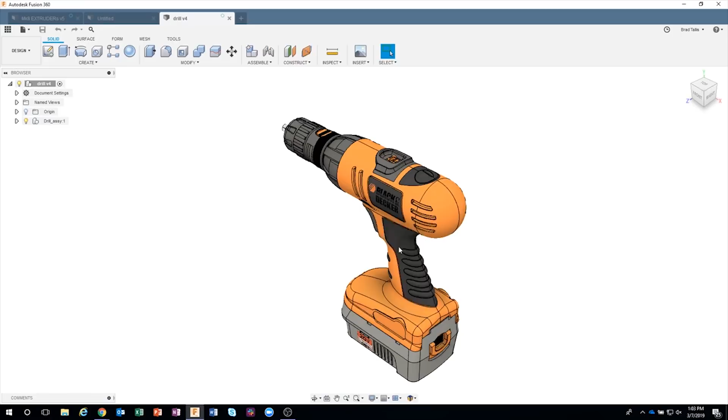wires in here? So if I open my browser here real quick, and my case, let me just turn this part off. You can see that I have a bunch of wires going from the switch to the motor and to the battery, etc. And people were asking, how do you create these? So I'm going to share these tips and tricks with you.

Okay, so I'm going to start out simple just to kind of show the methodology, and then what we're going to do is we're actually going to route some wires from this 3D printer hot end extruder. So I might want to run some wires from the hot end through this wire clip, and then I'm going to show how you could create, for example, a bunch of wires, and even how you could twist those wires together. So that's what I'll be showing today.

So the first thing we want to do is to create the path that our wire is going to route. And you want to stay as orthographic as possible. What do I mean by that? Well, I'm going to start by drawing a top view. So let's pretend I have a box in here. I'm trying to route the wires through this box. So this is looking top down. This is how I want my wires to go.

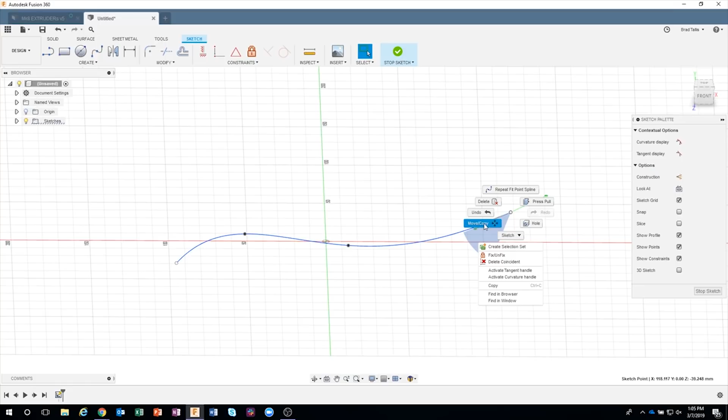Okay. Now, if we look at it from the side, these are all on the same plane. There's no height or anything like that. This is just a flat spline. But what's cool is you can actually come in, click on a point, and say move. So I right click on that point, and I'm going to say move. And this actually allows us to move it in 3D.

So you can kind of see as I'm looking from the top, kind of memorize what the spline looks like. You're going to notice that it's not going to change the look from the top, but now I'm going to look at it from the side. And again, I would recommend going as orthographic as possible. So now I'm looking at it from this front view, and I'm just going to drag that point up a certain distance. Okay, so it's no longer on a flat plane.

But if we look at it from the top, you'll notice that that didn't move at all. We didn't bring it down here or anything like that. We just told it to go straight up. Okay, so I could do that with other points. I could click on this point here, drag that point up, and now it still looks kind of like an S from the top, but then we've also given it a shape from the side.

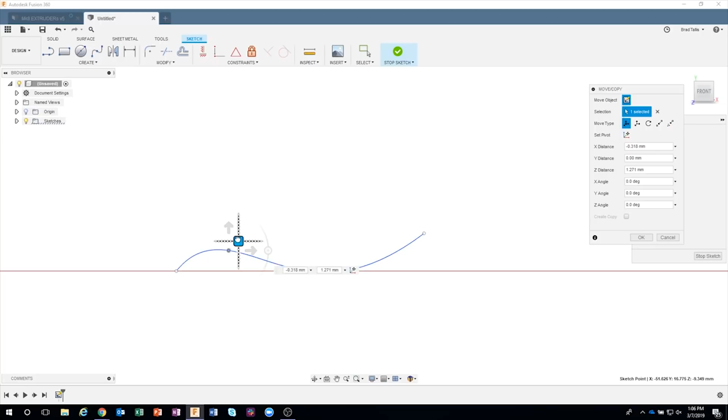Okay, I also recommend using just the arrows as much as possible. You can use these planes, but then you're moving it in two different directions. Instead of just straight up, you're also moving it to the right, okay? And that could change what your overall shape looks like. So once again, I recommend just doing one axis at a time, okay? So I'm going to back up here. I drew my top view.

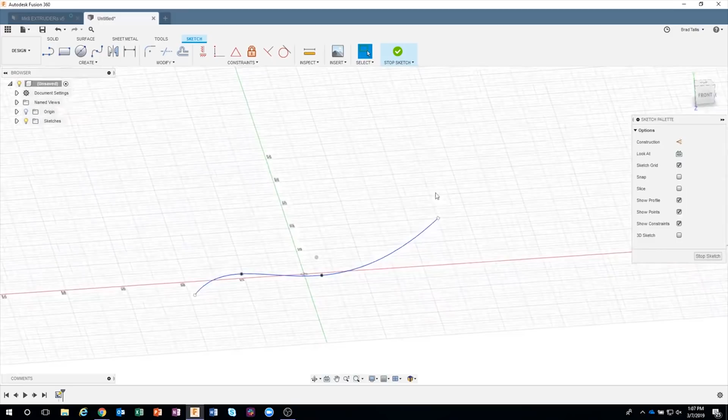Then I just click on a point, right mouse click, and say move. Then I'm going to rotate to a side view, or in this case the front, and just move that point. And I can be very specific. I could say 25 if I wanted to. And we're moving it just straight up. Okay? So that's the method for creating a spline that goes through space in all three directions, X, Y, and Z.

Now I want to sweep my wire or wires along that. And the second tip is I recommend creating a sketch plane on a path. Okay, and the reason for this, I'll show you. I'll go ahead and just click on this path. You can see that it's going to create a plane that's tangential to that path.

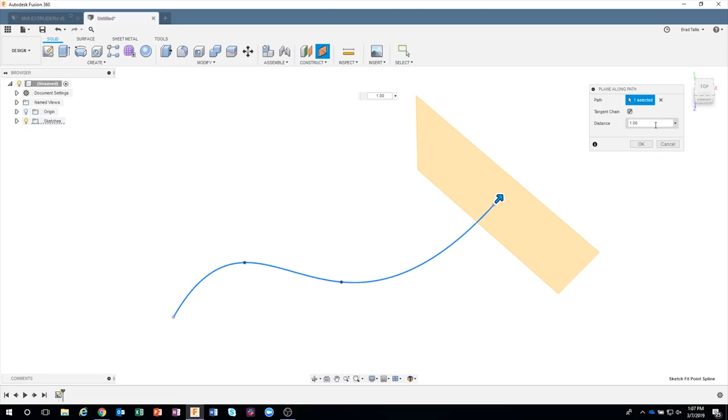Okay, and I'm going to drag it all the way here to 0. So we can kind of see it's at distance 0. If I go all the way to the end, it's going to be distance 1. It's kind of like a ratio. So if I had said 0.5, it's going to go obviously halfway along the spline. But I want that to be 0, and I'll say OK.

Now the reason for that is, notice if I turn on my origin, notice the orientation of my XY plane right here. If I drew a circle, it would not be tangent with that line, and it would look weird as it got swept along. I want the circle to be perfectly tangent at that point when we start sweeping.

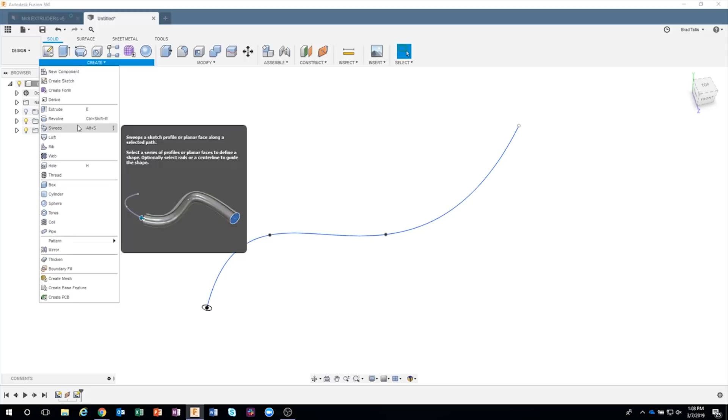So for example, I could come in here and say, let's create a circle. And I'll just make it maybe 5 millimeters in this case. I'll stop my sketch. We'll come in and sweep. I'll go ahead and click on my profile, and then I can select my path. And you'll see that it's going to take that circle and sweep it along that path.

Now, this is a pretty simple example. We're going to create multiple wires. And so let me back up here real quick. I'm going to go ahead and edit my sketch here. And I'm going to draw, let's do a couple circles. So I'm just going to come in here and say, let's just make that 5. And I'll do another circle over here. Let's just make that 5.

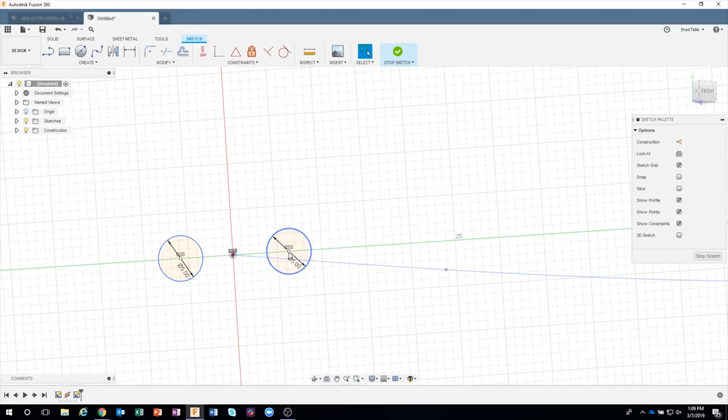And I want these to be horizontal to this origin point here. And then I could specify the distance apart if I wanted to. I could throw a dimension in there, but let's just do something like this. So now I have 2 wires.

I'll come in and create a sweep. I'll go ahead and select my profiles, which are these 2. Select my path, which is this one here, and you'll see that it's going to take those circles and sweep along that path. Okay.

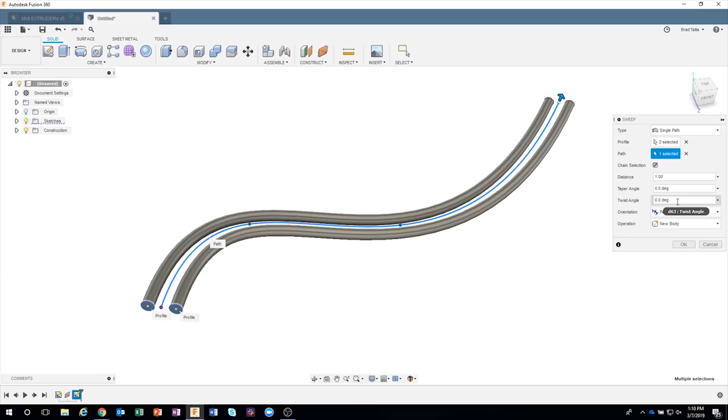Now, what we're going to learn about here in a little bit is this twist angle is really powerful for creating twisted wires, for example. So if I said twist 360 degrees, it's going to twist those around each other 360 degrees along that path. Okay. So I could come in here and say, you know what, let's do 3 turns.

So I'm going to say 360 times 3, and now you'll see how it takes that and twists those wires along that path. Okay, so that's how we're going to get the twisted wires on our extruder here in just a moment. But that's pretty cool. Now this is another little trick that I like to use.

It's not asking how many twists, it's asking for an angle. So I might want to know how many twists. So I just said go 360 degrees times 3. Or I could say times 5, and it's going to go ahead and twist 5 times as we do that. Okay.

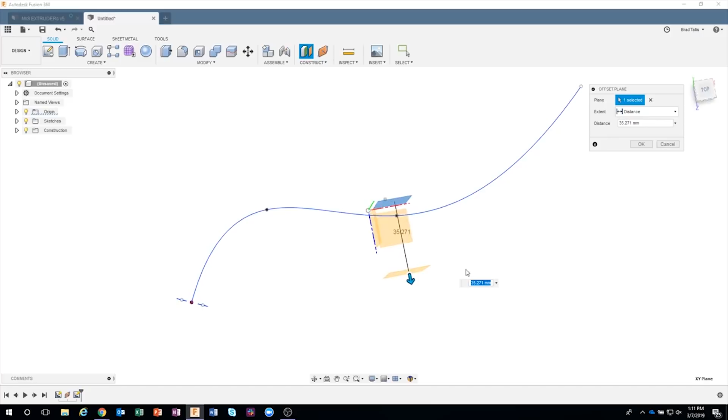So let me show you what would happen if, let me turn on my origin here, if we didn't worry about the tangency. So I'm going to go ahead and maybe put a plane right here, for example, and create my sketch. Oops, clicked too fast. I'll go ahead and say create sketch. I'll draw my circle kind of near the end point there.

So notice the orientation of the circle compared to the spline. In fact, I might move, let's move this point just a little bit. I'll move it down and back. So my circle is kind of like so.

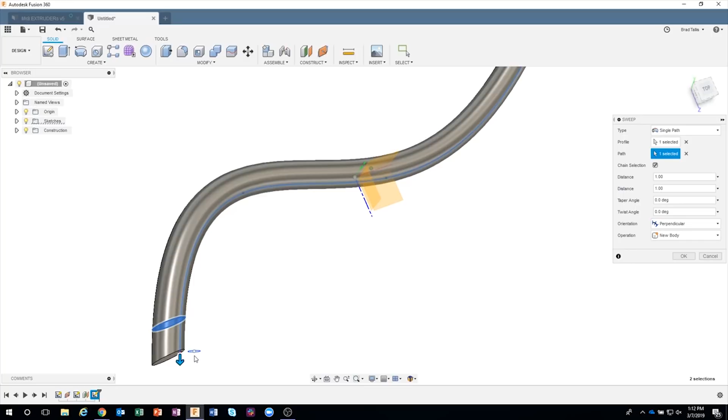If I said create a sweep, what's the profile and what's the path? You'll see it actually did a pretty good job in this example, but sometimes it'll pinch or whatever as it's going along. But it's much better to get your profile basically perpendicular with the path.

Another tip I like to share is when you're creating your splines, especially if you're going to twist, you want to keep your points pretty much evenly spaced. So you can see how it's much larger here than it is over here. And when you start doing your twisting, it might twist farther apart over here than it would in this section here. So if you can, it's better, and I know you can't always just because of the shape of your spline, but I would try and keep these fairly equal in size, these little segments you see here. Okay? So just shared a couple tips there.

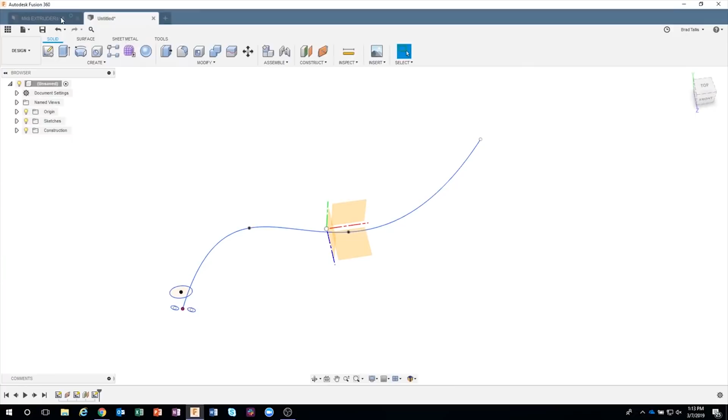Now we're going to put it into a real world example. We're going to use that 3D printer hot end. Maybe we want to create a realistic rendering of what this thing is going to look like, and I want to show how these wires are going to be routed and maybe where they're going to be routed. So I'm going to jump over here, and we're going to route two different kinds of wires. So I'm going to come off of the hot end down here and go through this self-adhesive little zip tie clip.

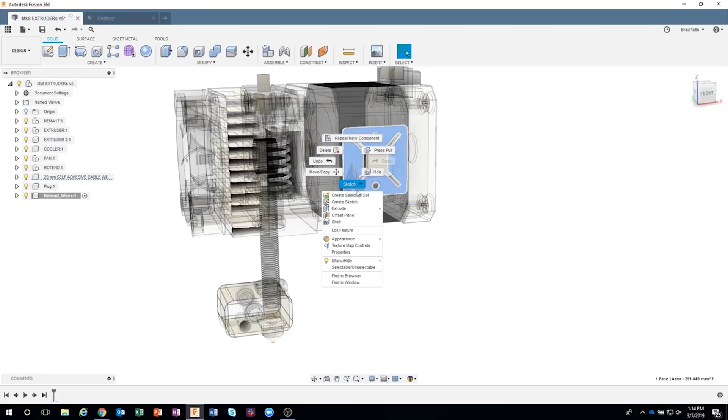Again, I like to work pretty much orthographically. So I'm going to start by kind of routing a side profile of where I want these wires to go. I'm going to start by creating a new component, and let's just call this hot end wires. So I'm creating a new component, and so all of my wires are going to go inside of there. And I'm just going to sketch maybe on this face right here. So I'm going to say create a sketch and start by drawing a spline, and I'm going to get fairly close.

In fact, you'll notice it's trying to catch to edges and stuff like that. I don't really want it to in this case, but I'm going to get fairly close where I want to start. And then sort of draw the overall shape. So this is going to come up here. Now I'm going to zoom up so you can kind of see what's going on. You'll notice it's trying to catch to these object lines. And I want to control my selection here. I don't want it to select those lines. So I'm going to hold down my control key, and now you'll notice that it's not going to snap to those object lines.

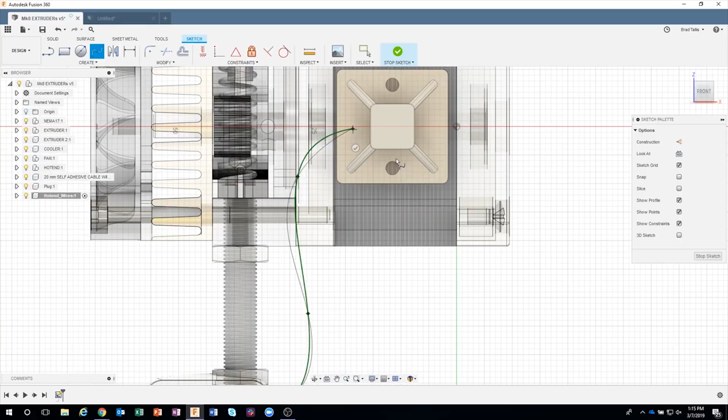And when you're creating these 3D splines, I highly recommend that you don't catch to these points, because these could go back, in this case, in the Y direction really far. And we basically want to be drawing on a single plane. So I'm just going to go ahead and maybe click there. Maybe come over here a little bit. Again, you'll notice it's trying to catch to a whole bunch of edges here. I'm just going to hold down my control key, and now it's no longer catching to those edges. So I might click there, something like this, and down here somewhere.

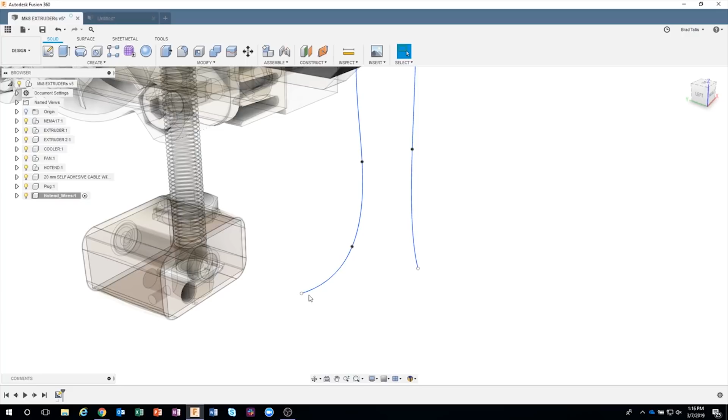Okay. So again, if we look from the side view, this is all on one plane. Okay. And let's just end over here somewhere. I'm going to go ahead and stop my sketch. So again, all on one plane. Now obviously the wire is not where it needs to be currently, but now I'm going to start using the move command to move some of these points. Now, what I'm showing here is an approximation. It's not going to be 100% exact. We just want to create a nice rendering of what this is going to look like. So I just wanted to get fairly close.

So I'm going to click on this point and say move. Now, I can come in here and drag it around if I want to, or I could use the point-to-point command in here in the move copy window. So I'm going to say point to point. What's the origin point? So this is the origin. And what's the target point? And I'm actually going to zoom up on these little wire studs right here, and I'm just going to click on that point there. And you can see that it actually took that point that used to be on one plane and now has moved it in 3D over to this location here. So we just said go from one point to another point.

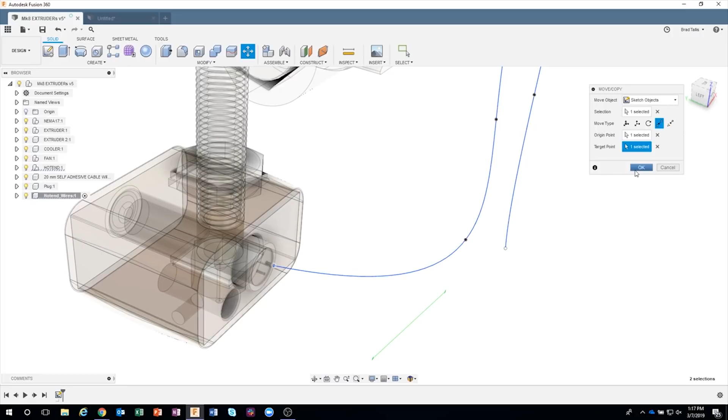Now, if we look at it from the top, we can see that the wire is kind of shooting off at a weird angle. I want it to come nicely out of this wire. So again, I'm going to click on that point, right mouse click, and say move. Now you'll notice when I do this, we get this green tangent line that appears. And if I look at it from the side, we can see it's at some weird angle. And if I look at it from the top, we can see that it's at some weird angle. Okay, so obviously we want to fix this so it's pointing straight out.

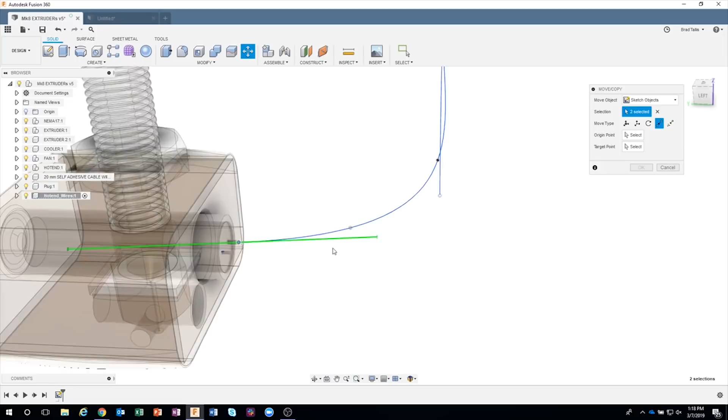So what I want to do now is click on that line, okay? And that's key, because if I had just clicked on the point, it would want to move the point. But I actually want to move the tangency line. And then I can come in and use this rotation. And again, I'm going to look at it from the side and watch what happens. I can rotate this and we can change the tangency direction of this wire coming out.

Okay, and like I said, I want to get it fairly close. I want it to kind of be sort of horizontal. Because I'm in 3D, I don't have constraints such as make that horizontal. Okay, so now I'm going to look at it from the top, and let's rotate it in this direction until it's mostly horizontal, like so. Look at it from the side, it's horizontal. We look at it from the top, it's horizontal. So now that wire is pretty much coming straight out of this hot end.

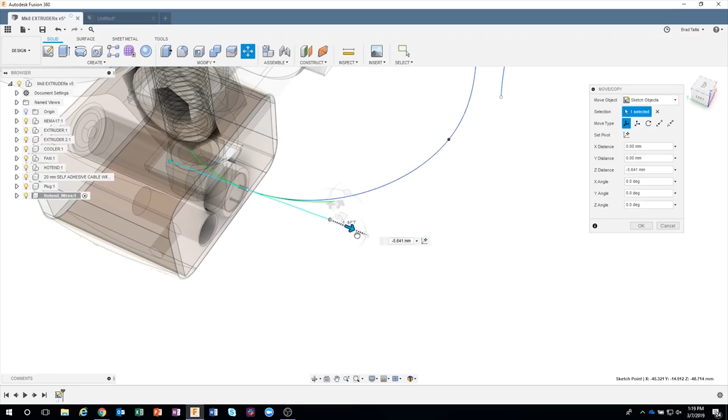And I could even come in and click on the end point here and move this guy, and you can actually change the weight, like how strong the tangency is. So you can see as I pull this to the right, it's going to stay straighter much longer and then suddenly curve. If I push it closer to the origin point, it's going to be a much more gradual curve and not come out as far. So you can actually adjust how tight you want that to come out. So I'm going to do something like that. So now my spline is pretty much coming straight out of that hot end.

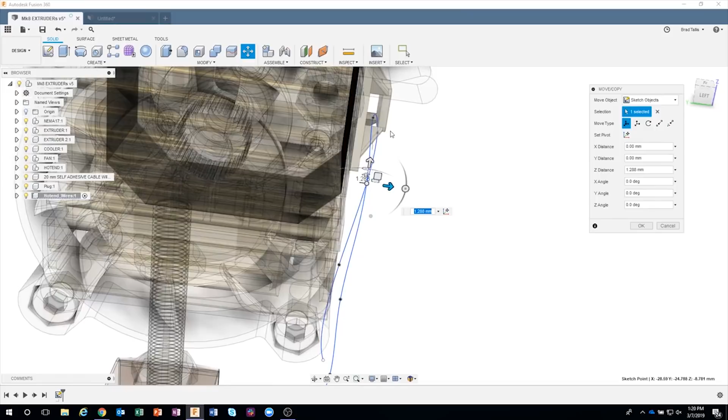Okay. So now what I want to do is kind of work on some of these other points. For example, maybe I want to pull this point, since it's sitting on that face, I might want to pull that out a little bit. So I'm just going to kind of drag this to the right. Maybe I'll do the same thing with this point over here, kind of pull that out a little bit. And here I am kind of doing it in 3D, where I said stay orthographic, but now that I'm seeing what's going on here, I can visually confirm that I'm just pulling it in one direction. So let's pull this guy out a little bit like so to smooth out this transition. And so now maybe finally we'll pull this one pretty far away from the hot end.

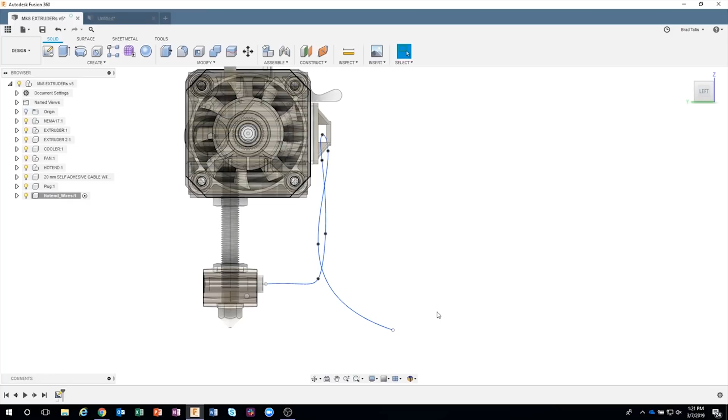Okay, so looking at it from the front view, it's pretty much the exact same shape that I drew it in the front view. We started here, and I kind of went up and then through this little clip and back down again. And then we switched to the side, and we started tweaking these points. So we brought this point over, I pulled this point out to the right a little bit, I centered this one in the opening, and I finally pulled this point out to the right. Okay.

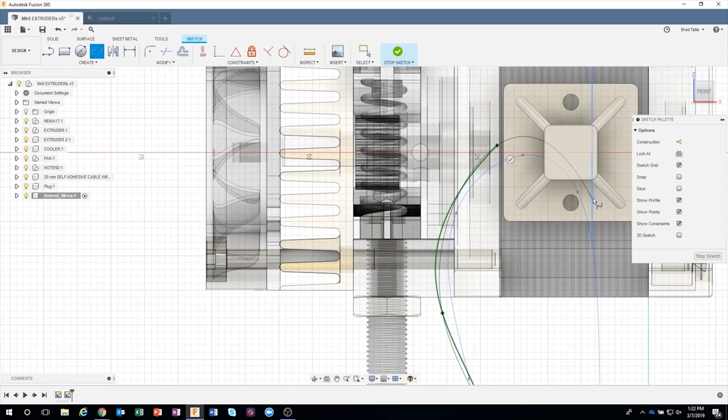So I could do the exact same thing for the other wire, but to save time, it's the exact same scenario. I would just come in and create a sketch. I could do it on this face, and obviously this time I would create a spline kind of near this point over here and sort of match. You know, I might go something like this. Maybe I cross those wires a little bit, come through, and notice there I made a mistake. I actually snapped to something, and if I rotate, good.

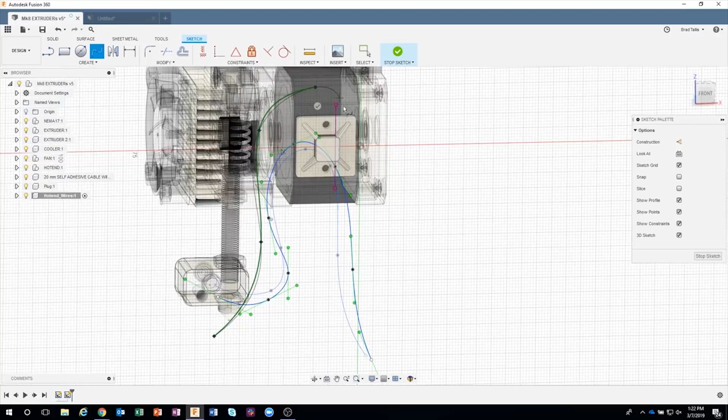Actually, I have 3D Sketch turned off, so that's another tip I should share with you. When you're doing these kind of 3D splines, I recommend turning off 3D Sketch. Otherwise, it would have snapped back to that location that I clicked on. So I actually was lucky in that case because I have 3D Sketch turned off. Let me show you what I mean really quick. I'm going to turn that on. I'll draw another sketch. I'm just going to click somewhere. And sometimes it will snap. Nope, it didn't. Okay, it's staying on that plane. Thank goodness.

Okay. Sometimes it'll snap back to those other things. So again, I recommend turning off 3D Sketch. So I'm going to go ahead and stop the sketch here. And we now have this new sketch that's all on one plane. So let me just move this guy really quick and I'll sweep both of these.

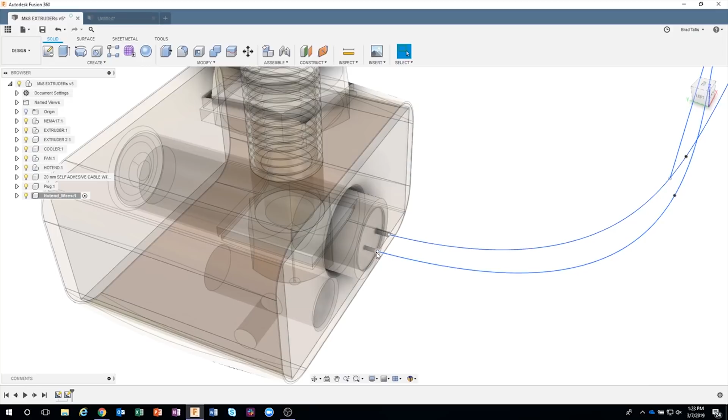So I'll do, again, point to point. I'll say that point there to this, oops, too close, to this point here. Then I might come in and move and just fix the tangency direction. Notice how it's kind of sloping down. I'm going to click on that guy there. And just a second here, I want to click on that endpoint, say move.

And this is what I was talking about. So I want to select that edge or that tangency edge and then say rotate. And then I'm going to start to rotate. You can kind of see what's going on there.

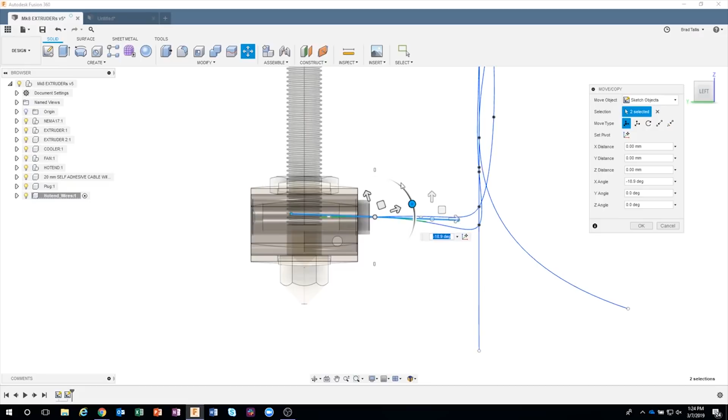Now, you might ask, why are you going planar or orthographic to the screen? And the reason is if I kind of go like this, you'll see how things are kind of tilted, and it makes it a little bit harder to make those adjustments. But if I'm looking straight down, I can visually see the direction, and I know that I'm rotating in the correct direction there. So I get fairly close to horizontal, and there we go. We're good to go. Okay.

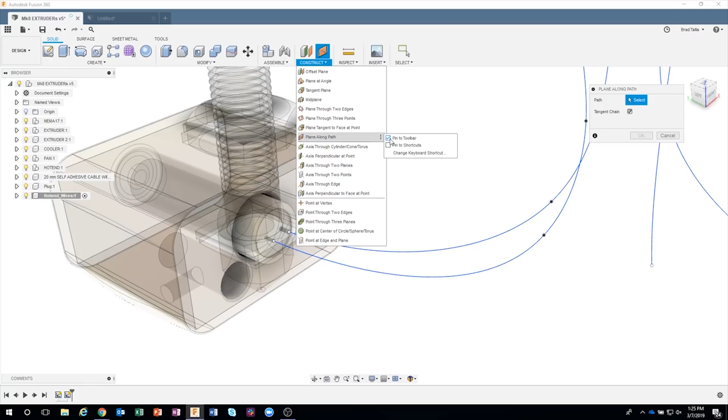Now I'm going to purposely not move any of those other points on this second wire that we just created, and I'll show you why here in just a moment. So now I have two separate paths. So I can't sweep both wires at the same time because there's two separate paths. So I'm going to come in here and do my plane along a path, which I created a shortcut right up here. If you use this a lot, you can just hover over these little triple dots, and you could say pin to the toolbar, and it'll pin it up to the toolbar.

So I'm going to go ahead and select, actually let's do the first one that we did first. I'm going to drag it all the way to 0. I'll sketch on that plane. And what's cool is my path is right at the very end, so it actually catches right to it. So I just have to get near it and say, let's just make this a 1 millimeter wire in this case. Now, like I said, I can't do both of them at the same time because there's two separate paths here. But I'll come in here and create my sweep.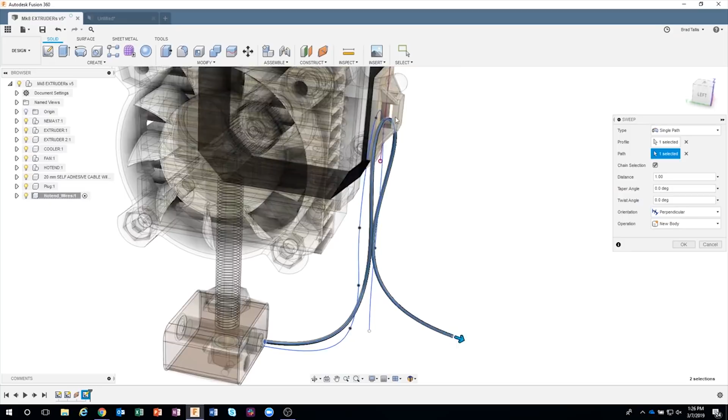There's my profile, and here's my path. And it's going to give me a graphical representation of what that looks like. So we can verify that sure enough, it's coming out, it's going up, it's going through this little zip tie clip, and then coming down here. I'll say okay, and there we go.

Okay. I see a lot of comments. Hopefully this is all making sense. Aaron, thank you for hanging out with me and answering all of these questions for me. I appreciate it.

So now what I'm going to do is the exact same thing on this other wire. I'll create a plane along a path and drag it back like so. Create a sketch on there and draw my circle. Now this is the one where I didn't move any of the points. And we're going to see something interesting here when I create my sweep. I'm going to say create a sweep.

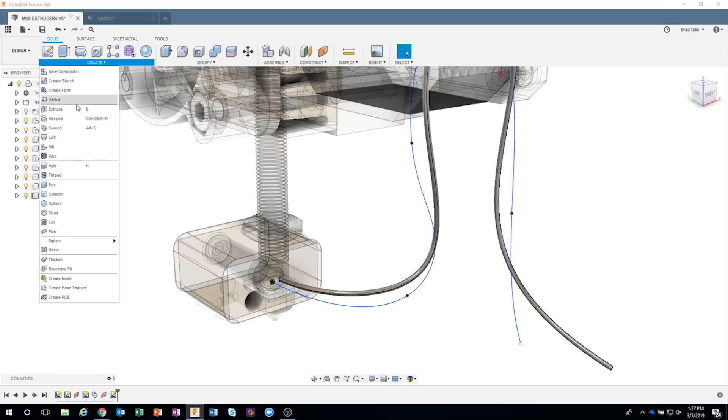Here's my profile, and here's my path. I'm just going to go ahead and say OK. And it looks like it turned out pretty good. It created that wire. Now, something I typically do, and this is just my anal retentiveness, I sometimes come under inspect and I want to know, are these wires interfering with each other?

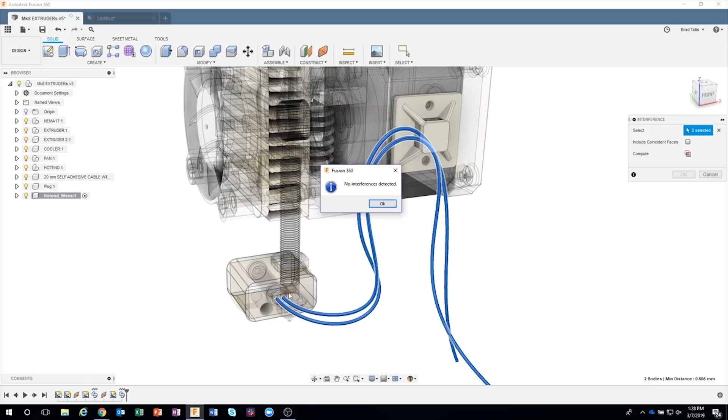So I could come in here and say interference, and I could select one of those wires and the second wire. So we've selected 2 wires, and I want to compute, and luckily there's no interferences. Okay, so these 2 wires are actually not touching each other as they're being swept through here. So I actually was pretty lucky. Typically they intersect each other. Now here's what I think is so cool. I can come in here and let's expand open our wires, expand open our bodies.

We can see the 2 separate wires right here. And I can also expand open our sketches. So let's turn off body 2 and let's turn on the sketch for that. And I'm just going to come in here and move that point. So let's pull it maybe out this way a little bit, like so. And watch what happens. I'll turn the body back on.

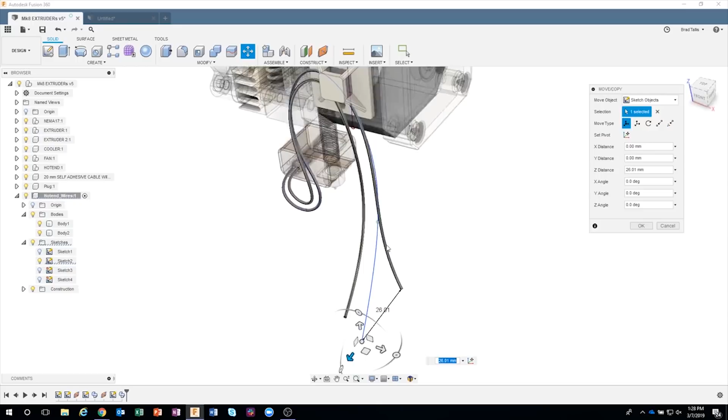So here's where it was. I just moved that point, and when I say OK, it actually updates those wires for me. And this is, I think, really kind of cool because I can come in and move these points. I'm going to say move. I'm just going to pull that out a little bit like so. Make sure I'm grabbing the wire. Yeah, so here you can see why I sometimes turn off the body.

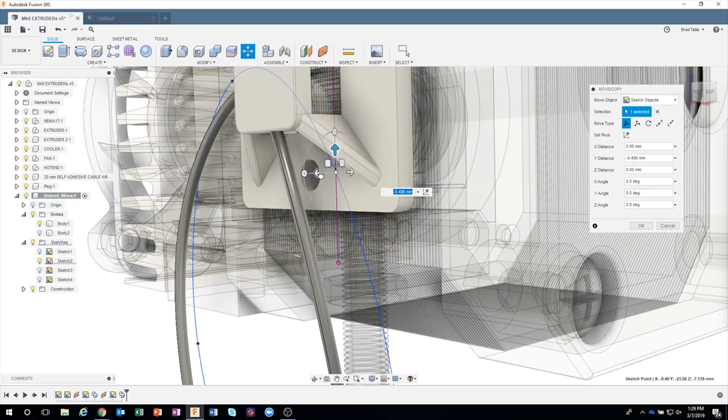So I want to grab that point and move it. And let me make sure. Yeah, there we go. I must not have been grabbing the right point. Oh, it's because, aha. So here is exactly what I was talking about. I'll be the first to admit, I make mistakes. And remember earlier I said, hold down the control key so it's not snapping to those objects in the background. And I said, because sometimes that can burn you.

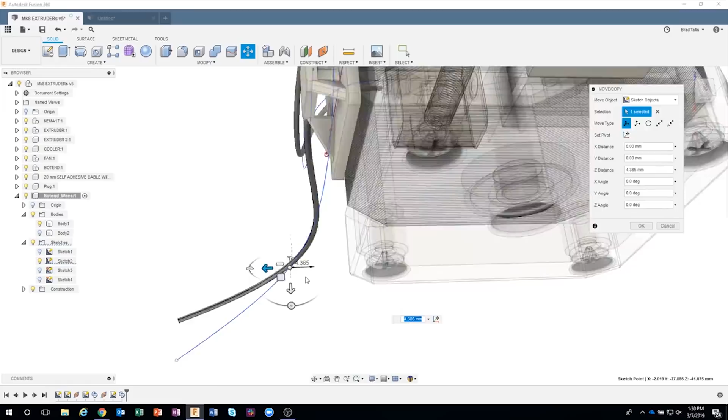I just got burned. It's actually snapping to an object line. So that's why it's not letting me pull that line out. I can move it up and down and stuff, but it's basically snapped to that line. So again, that's the reason why I say hold down your control key so it doesn't automatically snap. So just to speed things up, I could unassociate that, but I'm going to move this guy over. I just want to do something kind of like this, where they were accidentally going through each other. I'll turn the body back on.

So now I'll do my inspect, interference. I'll pick one wire, I'll pick the other wire, I'll compute, and it actually shows me some of these wires are intersecting. If you zoom up, it's kind of hard to see because it's colored red right here, but it actually shows where these parts are intersecting. And this happens a lot when you're routing wires. They might overlap each other.

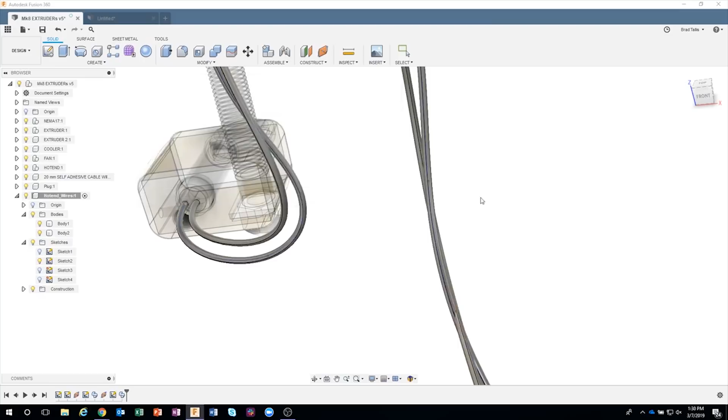So the easiest thing to do is just to come in and pull one of those paths, one of those sketches. So move, kind of look at it from the side. Let's move that over a little bit. That looks pretty good. Move it over this way. Maybe that looks pretty good. I'll say OK. And now my wires aren't intersecting each other anymore. Okay.

Okay, so let's move on to actually creating multiple wires and actually plugging them into a plug. So I'm going to go ahead and activate my top level component here. Oh, you know what? Just for fun, let's go ahead and color these wires just so they look a little bit different. So I'm going to hit A on my keyboard for appearance. So A brings up the appearance window. And I'm just going to come in here and expand open plastic because the wire's made typically out of plastic.

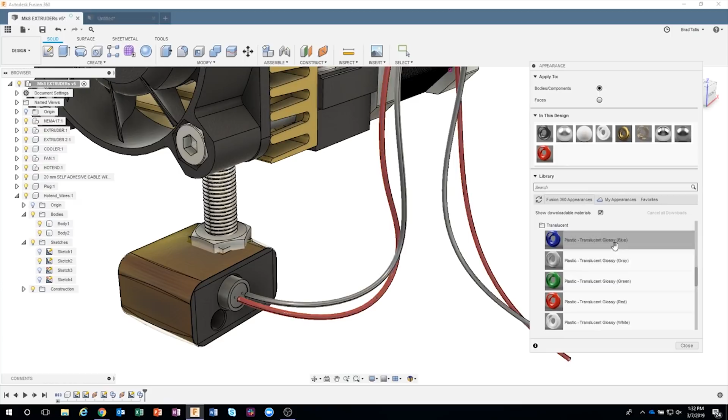I'm going to scroll down a little bit. And there's opaque, there's textured, there's translucent. I'm going to come in here and go into translucent. And let's do maybe a red wire. So I'm just going to drag the red over onto that guy. And then maybe I want to do a black wire, but you'll notice that there's no black in here. So maybe I'll just grab this white and drag it on there.

But then I can right click and say edit. And this allows me to pick the color. So I could come down here and drag that to black. And maybe we'll just rename this to black. So it makes it a little bit more realistic, showing the actual colored wire. So now we can see the red and black wire.

Okay. I see Aaron is very busy answering questions, so hopefully this is all making sense.

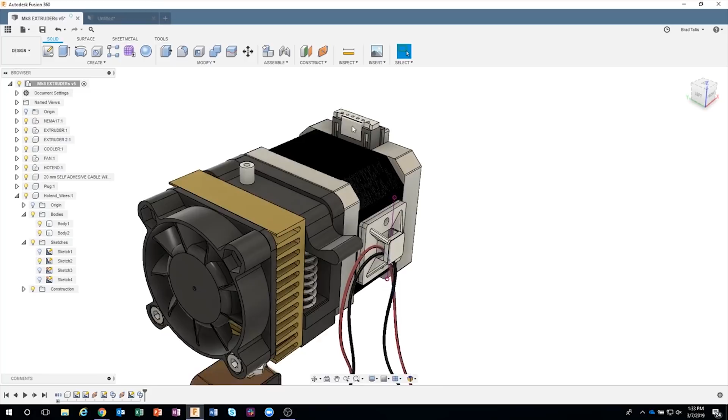So let's take it to the next level. Now we're going to route the wires from this plug. I want them to come through this zip tie clip and then just off to the side. Now I have this plug in here that goes in, fits over these pins or whatever. So I'm just going to basically make my wires come into this particular plug. So I'm going to start by creating a new component.

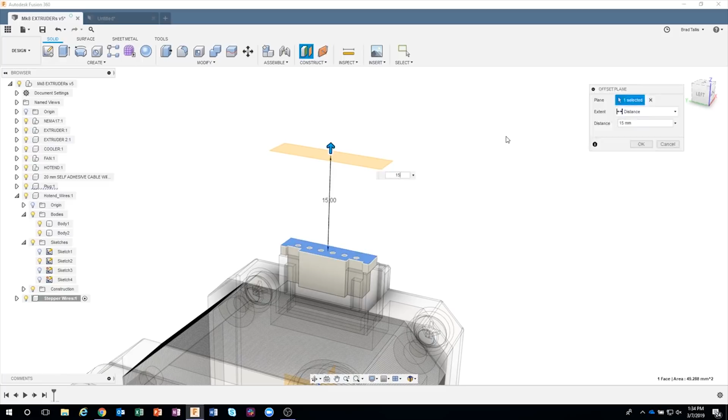And let's just call this stepper wires or something like that. So now I have a new component called stepper wires. I'm going to start with an offset plane off the top of this plug. And this will make more sense the farther we go, but I'm just going to come up here. It looks like around 15 looks pretty good. So I'm going to just offset this plane about 15 millimeters.

Okay. Then I'll sketch on here, and I'm going to draw my wire bundle. So I'll just come in here and maybe draw a circle. We'll make them 1 millimeter in diameter for the wires. And I'll create a circular pattern. Again, this will make more sense as we get farther along. And I need to do 1, 2, 3, 4, 5, 6. I need to do 6 wires in this bundle. So I just turn that up to 6.

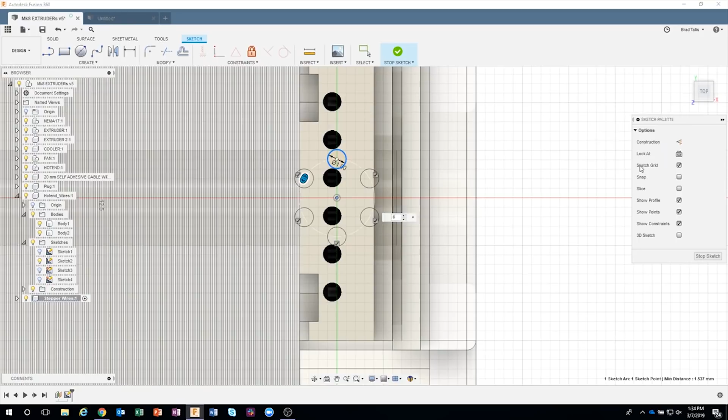I'll say OK. And maybe I want to bring these wires closer together. And I love this with the pattern command. I can just move one of these and they all move. So I'm just going to move this a little bit closer, like so. And say stop my sketch. So I basically created a little bundle of wires right here.

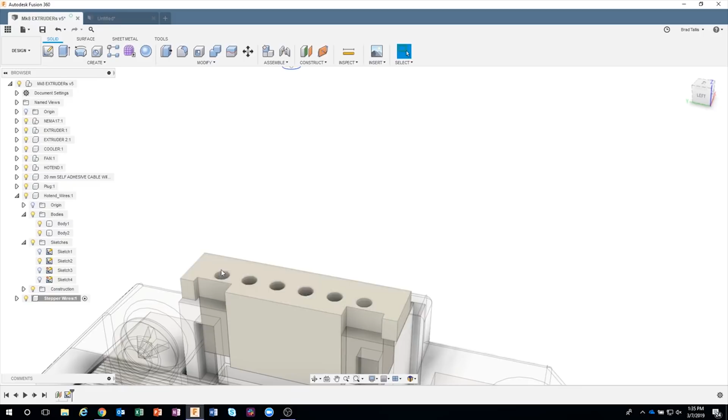The next thing I want to do is to bring them down into each of these individual ports. Now to simplify things, I want them to go into the center of these holes right here. So I want to create a plane that slices right through the center of these holes. And I think one of the easiest ways of doing this is to use the construction menu and use axis through a cylinder. And I'm just going to click on one of these. It doesn't matter which one I click on. And it's kind of hard to see, but it just took an axis line and put it straight through there.

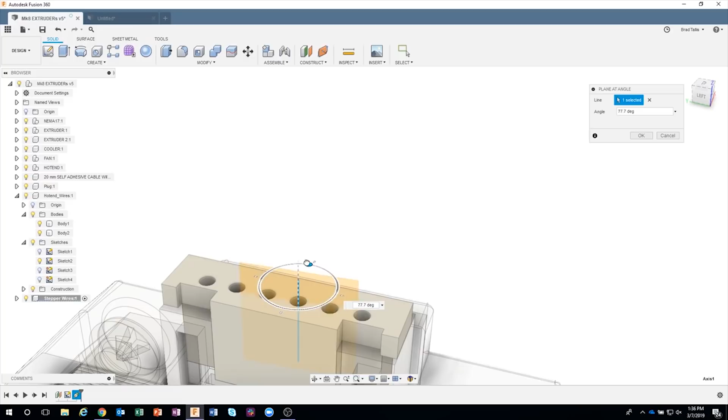So I'll say OK. And I now have this axis line, which now allows me to say plane at an angle. And notice it's asking for a line. So I can click on this line and you'll see that it puts a plane slicing through that line. Well, I want it to go this way, so I'm going to rotate it exactly 90 degrees. And now we can see that that plane is slicing through those holes.

I'll go ahead and make this a little bit larger. Hopefully you know that trick. If you drag the corner of a construction plane, it allows you to resize it. Okay, so now we can visually see that sure enough this plane is slicing right through it. And I'm going to go ahead and sketch on that plane. Okay. I'm going to project some geometry. So under Create, Project, you'll notice the P key is the shortcut key, which I always use the shortcut keys.

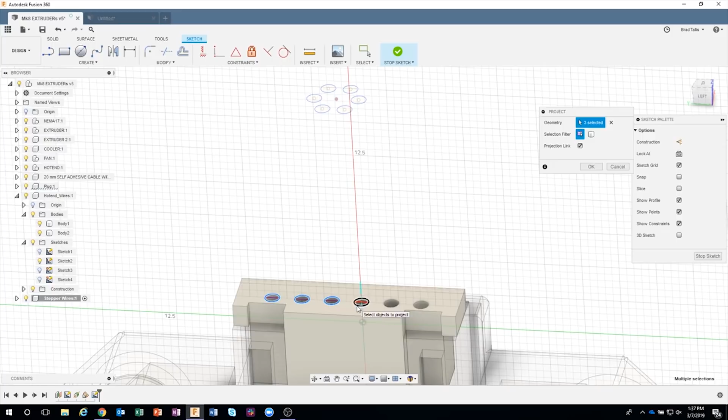So I'm out here, I just hit the P key, and it's going to project some geometry. So I just want to click on these holes here, and I'll zoom in so you can kind of see what's going on, but it basically projected, when I say okay, it projected these lines for me. And now I can use those lines to catch to. So I'm going to create some kind of free-form shapes here, and I think spline. Let me go ahead and click on that guy there.

And all I have to do is get near this edge, and you'll see how it snaps automatically to the center. And I think this is really slick. It's like an automatic thing here. I'm going to go ahead and click. And looking at it from the side, I'm just basically going to click one point and then maybe another point up here somewhere. Okay, so pretty basic spline. In fact, I'm going to do this multiple times. Get near the center, click, and click.

And right now it doesn't matter what the shape of my spline is, where it ends, or anything like that. I'm just basically kind of representing the wires per se. So just something like this. I'll say like that. And one more.

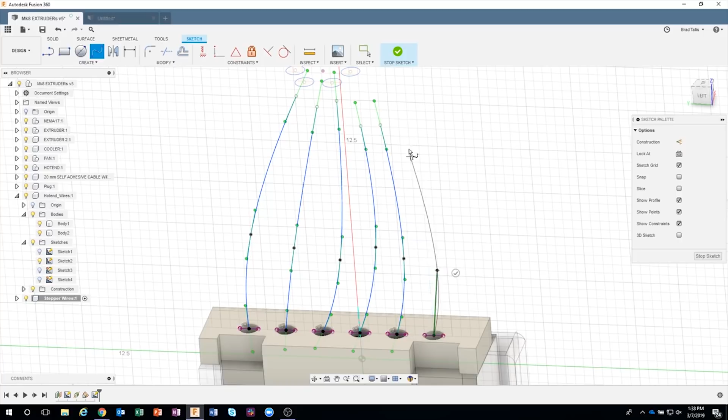I'll go up a little bit further that time. Okay, so I just graphically quickly created these splines, and again, they are all on one plane. We can kind of see that. And I want to be very specific. I want these wires to go straight down into these holes. And we can control that using this green tangency line. So you'll notice I can change the angle and I can change the weight of the tangency.

So here's a neat little trick. I can click on that green line and say I want that to be vertical. And you'll notice it instantly snaps to being vertical. Where these are kind of at an angle, this is now saying that spline has to come straight out of the hole and then start to curve. So I'm just going to do that on all of these. I'm going to say I want all of these tangency directions to be vertical. So I just click on them, and we can see that we've now forced those to be vertical.

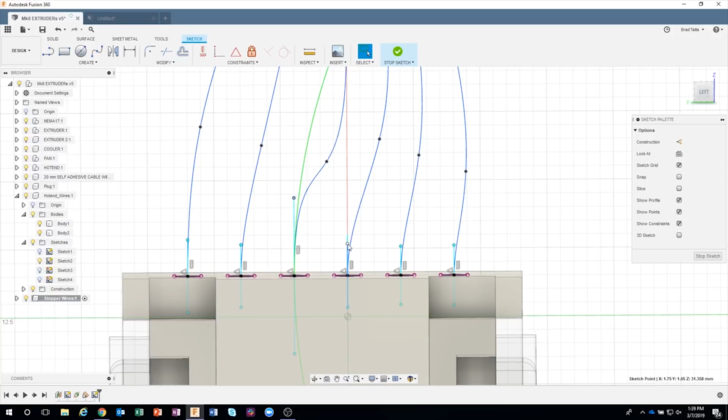And again, if I drag this, I can change the weight of that tangency. So you can kind of see how dragging that up makes it go straighter, much longer, and then finally curve. So you can come in here and tweak some of these to make the curves just a little bit more straight out. Okay. And so there's my wires going nice and straight into my plug.

Well, now I want to connect these guys to my wire bundle up here. So again, I'm going to click on a point, and I want these to be vertical before I connect. And I'm going to emphasize this. There are some steps and some order that you have to do here, and I'll purposely make a mistake to show you what would happen if you didn't do it in the right order. So as you practice this, as you play around with it, just make sure you follow these steps. And I will upload the assembly here so you can play around with this on your own time.

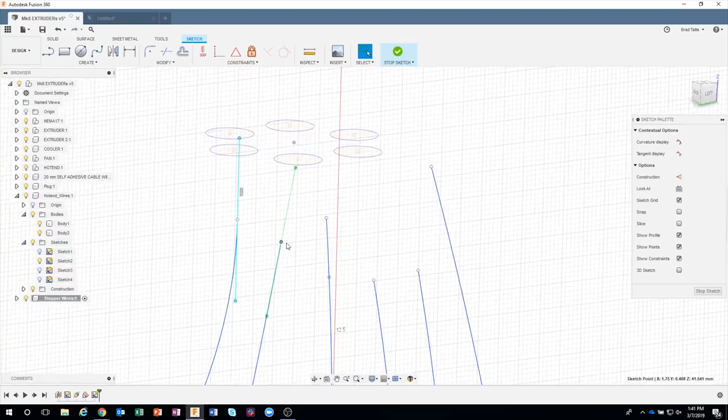Okay, so what I'm going to do is click on that green arrow, and notice I can add a constraint. So I'm going to say make that vertical, and you'll see, sure enough, it forced that tangency to be vertical. Now the reason it let me do this is because I'm on the sketch plane. It's allowing me to do constraints. But watch this. I'm going to purposely make a mistake here. This one is not straight up and down. I'm going to right mouse click and say move. And I want to move 2 points. So I'm going to go from this point here to that point there. And sure enough, it took my spline and it moved that endpoint up there.

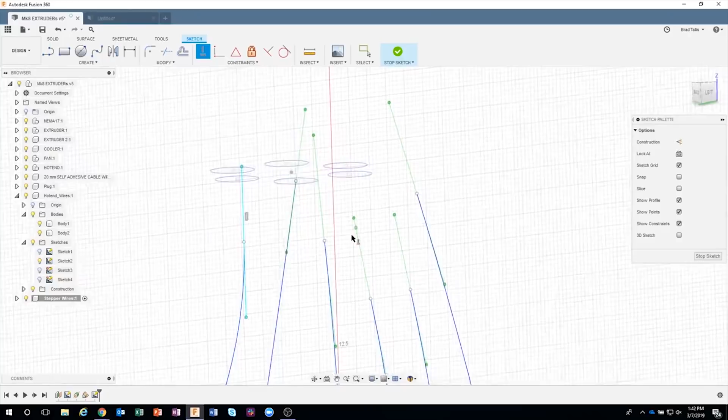It looks great, but you'll notice that the line does not come straight down. So you're like, okay, just add a constraint. Well, when I click on it now, here's my line. But if I click on vertical, you'll notice it doesn't do anything. And that's because this is now in 3D. So it doesn't know which direction or anything like that. So before you move these points off of the plane, you'll want to force all of the endpoints to be vertical. So I'm going to click on that guy, say vertical. I'll click on this one and that guy, that one, and finally that one. So now we've basically said we want all of our splines to be tangent or straight up and down at the very end.

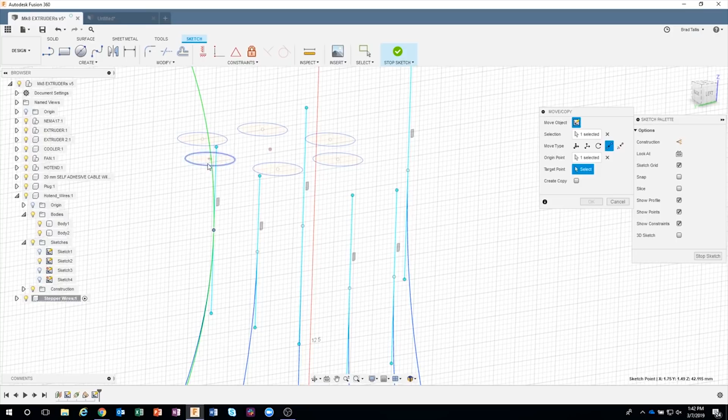Now when I come in and say move, I can move 2 points from that point there to that point there, and it's still nice and vertical. And this is really key. We're spending a little bit of time making sure everything is tangent or constrained, like vertical, for example, because if we didn't, and my wire ended up at an angle and my spline came up at a point, it would look kind of kinked and it just wouldn't look all that great. And we want to try and make this look as nice as possible.

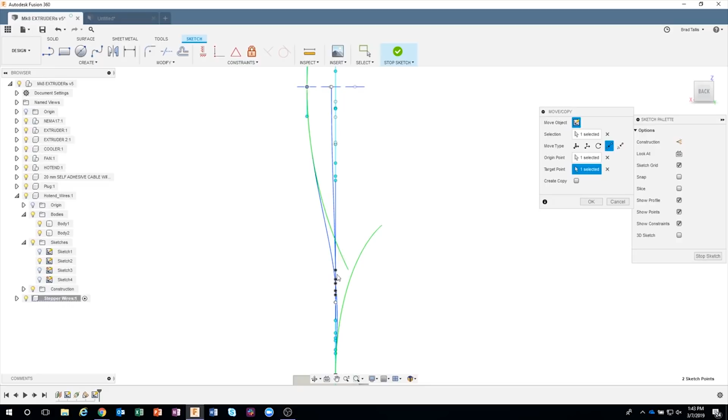Okay, so quickly, I'm just going to basically connect the dots. So I'm going to use my move command. I'm going to say, let's move that point there from point to point. So I'll say that point to this point. And notice it actually moved that wire back. Let me take a look at it from the side here. You can see how it went up and then to the back right here. So now we're giving it kind of that 3D look.

So I'm just going to do that really fast on these other ones. So we'll say maybe this point here goes from here to here. I'm just snapping to those endpoints. Let's say this wire here goes from that guy to that back point there.

And I'm just repeating my last command by dragging straight up with my right mouse click. And I'll say, let's go from here to here. I must have clicked the wrong point. Just let me see. Oh yeah, I clicked the tangency point instead of the actual end point. So you do have to be a little bit careful.

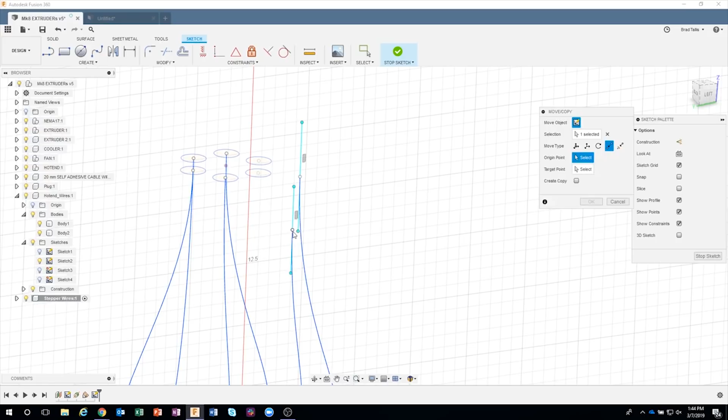So I'm going to say I want to go from that point to that point. That's better. And then the last one here, same thing. I'm going to say that endpoint goes from there to there. Okay, so now if we look at this, I'm going to stop my sketch. We have all of these wires coming down. They all end up in a nice straight line, but you can see how they're all coming up to an individual wire endpoint up here. Pretty slick, I think.

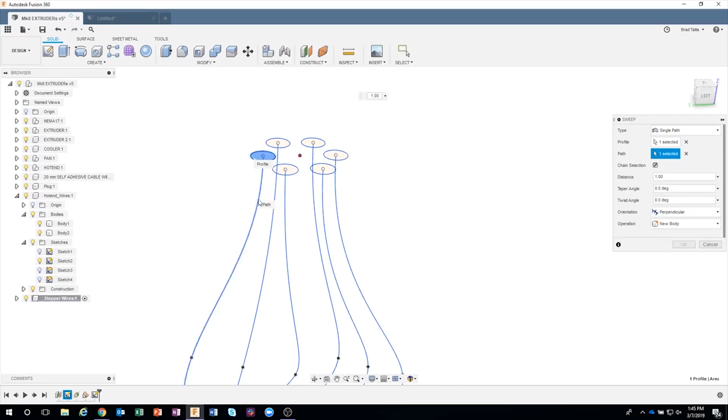Okay, so let's go ahead and sweep these. So I'll say sweep. Again, I have to do these unfortunately individually because all the paths are different. So I'm just going to select my profile and then my path. I'll say okay. Now my sketch went away, but all I have to do is expand open my stepper wires and turn on those 2 sketches. And I can do the same thing. I'm just going to come in here and say sweep that guy. Sweeps on that path there.

Now, I'm hoping something will happen here, but it actually looks like our splines are pretty good. So we might not run into the problem I was thinking about. But if you go ahead and select a path, and instead of new body, it actually says cut and it turns red, that means that some of your profiles are intersecting, and you would just have to move your profile slightly, like I've already shown.

Let me go ahead and I'll do this guy here and select my path. I'm going to purposely make a mistake here so you can see what I was talking about. So I'm just going to move this guy over like so. Okay, so then I'm going to come in and sweep. Here's my profile, here's my path, and this is what I was talking about.

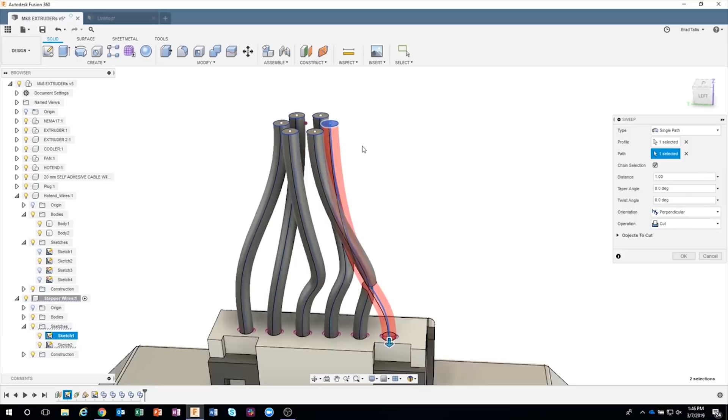So you can see how it's red, and the reason for this is because it's intersecting another body, so it thinks that you want to cut that away. So this is a really graphical representation that I need to change my spline. Okay, so I would move my spline, but I'm just going to undo in that case. So sweep, path. Okay, so there's my wires.

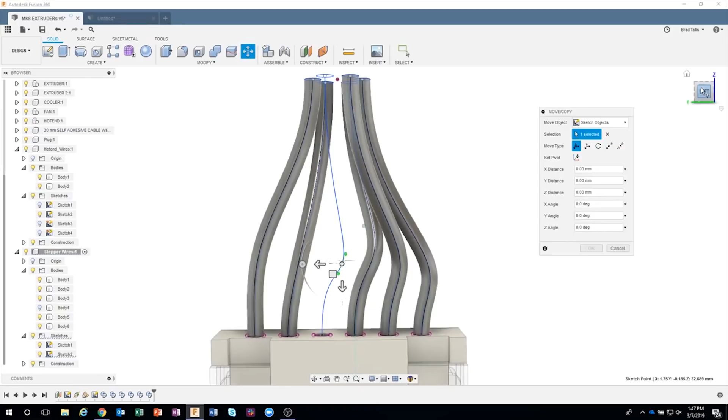Now, just like I showed before, I could come in, let's expand our bodies, and I could even rename these if I wanted to. But I could see, for example, body 4. Let's turn that guy off, and I want to move that point. So I'm going to look at it kind of orthographically. Let's just move it up a little bit, like so. And then we can turn that guy back on, and you can see how I smoothed it. It wasn't such a tight kink. So you have the flexibility to edit those.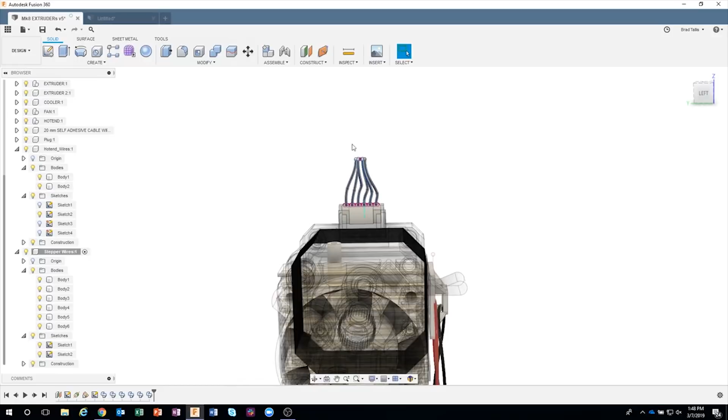Okay, now I want to route my bundle down through this clip. So basically I want to sweep all of these along a path, but I don't have that path created yet. And in this case, I'm probably going to draw it from this side view to come down through the clip. So again, I need to have a sketch plane, and I want it to go right through the center of all of these circles. And you'll notice there's a point right there.

So I'm going to come in and say axis perpendicular to face. Let's see if that one's going to work. There's the face, and there's the point. So there you can see, sure enough, it's perpendicular to this face, and it's going right through that point. And this point is basically representing the center of my pattern.

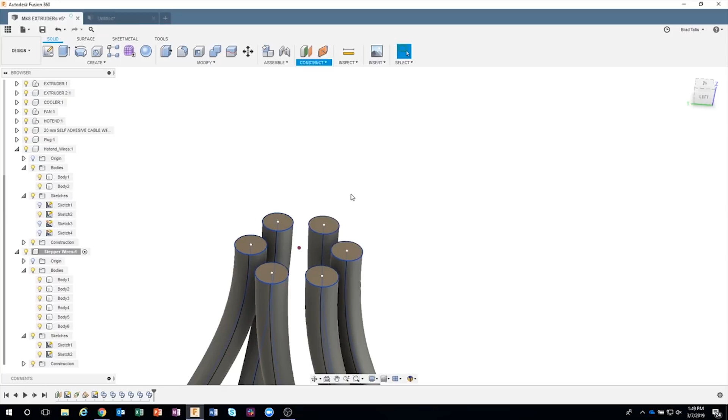So let me do that again. I went under Construct, axis perpendicular to face at a point. Okay? So I'm going to say one of these faces, it doesn't matter which one. There's my face. Now it's asking for a point, so I'm going to click there.

And then that's going to allow me to say plane at an angle. So I'll click on that guy there. And again, I'm going to rotate it 90 degrees, like so. So this plane is slicing exactly through the center of my wire bundle there.

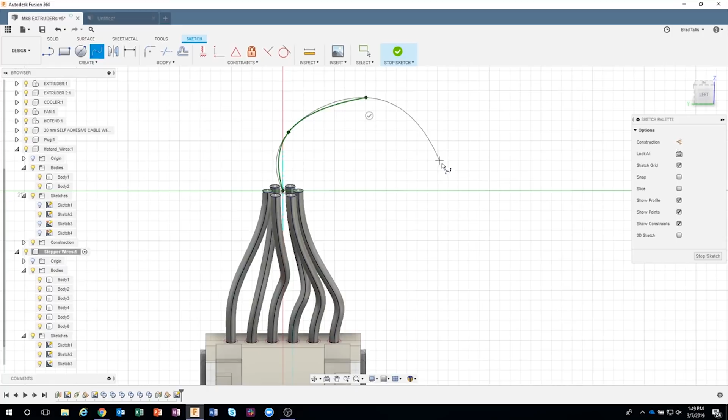And I can sketch on that plane. So just like before, I'm going to catch to that point there and maybe just kind of draw overall shape. Come like here, looking at it kind of from the side view. I want to make sure I kind of go right through the center here, like so. Maybe we come out the bottom a little bit, and then I want to end up somewhere over here. Okay, so again, just kind of a basic shape.

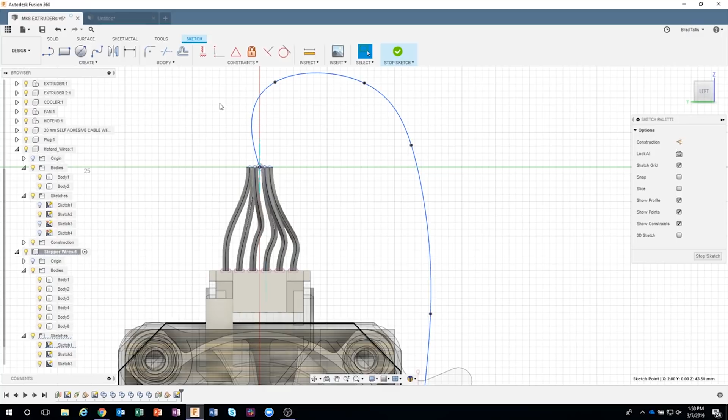And now I might come back and just drag some of these points around. Maybe I lift this point up a little bit, bring him over. Okay, then I'm going to come in and I want to fix the tangency directions of this. So let me go ahead and click on that spline, and we can see here's my tangency for that endpoint. So I'm going to click on it and force that to be vertical. And now we can see that my spline is definitely coming straight up and out.

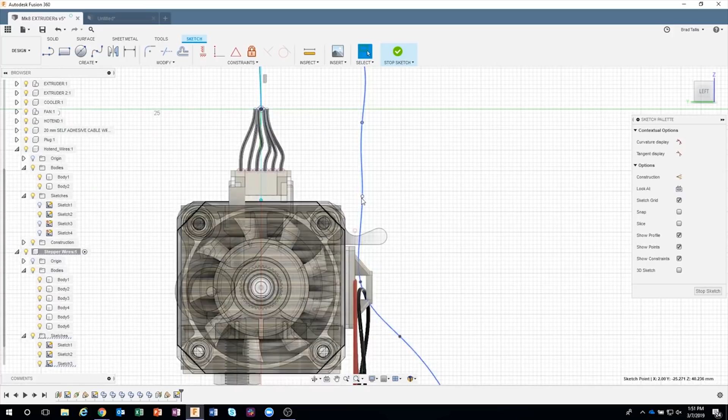Okay, so that's good. I'll look at it from the side again, and maybe as I look at this, these are a little bit too kind of close together, so I might pull these up a little bit more, have the wire come up and over. Again, I have a lot of control on what I want this to look like. Same thing here, I want this to kind of come straight down. And now let's take a look at it from the side, and we can see that obviously we're way off, okay? But now I can start moving some of these points.

So let's look at it from the side. I'll grab that point there. And I usually do the more major points. So like this one I know has to go through here. So I'm going to drag that to the left. And you can see it's kind of creating a major curve. So I might come in and say, okay, let's move that point to the left a little bit. That's going to kind of help smooth things out.

So I can grab these. And I grabbed the wrong one there. Want to make sure I'm grabbing the right point. Drag that guy to the left. So now you can kind of see we're starting to improve what the shape of this spline is looking like. So it's coming straight down through this clip. And again, notice how I'm using just pretty much a single arrow to define the direction I want these to go. So let's just maybe, I'll come over here.

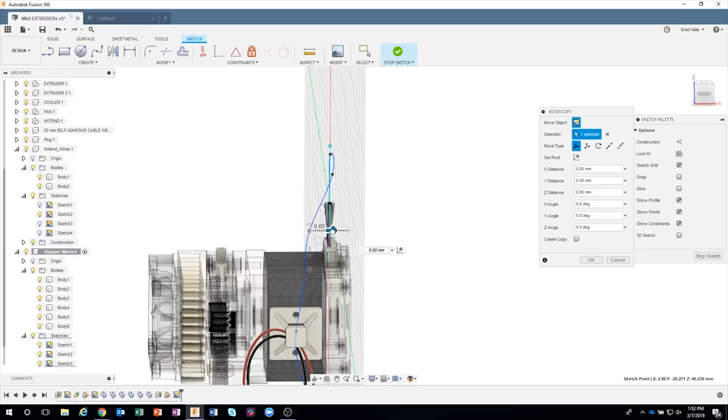And let's take a look up here. So these are kind of coming straight up. So maybe I'll pull this one over slightly. Maybe something like that, just to kind of make a nice smooth transition. So I've said this multiple times now, but it doesn't look any different here. It's the same shape that I drew because I'm only moving in one direction at a time. So I drew my basic path, then I came over here and I tweaked with that path, moving those points just to the left. And that's the important part. Okay, so I'm going to stop my sketch.

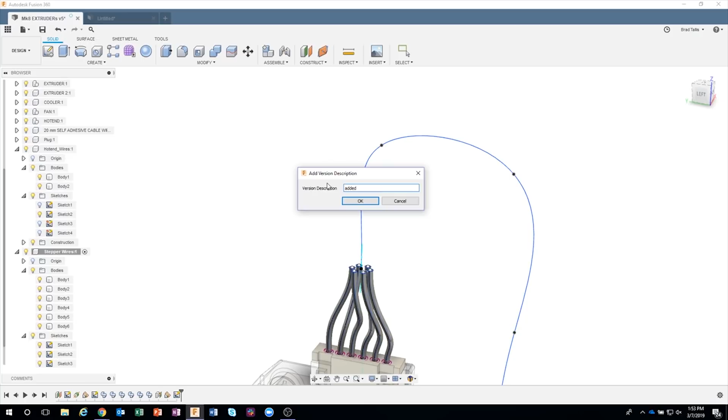We'll create our sweep. And you know what? I haven't saved this recently, so I'm going to go ahead and save. And I'm just going to say added wire harness or something like that. Okay. So I'm going to come in here and create a sweep.

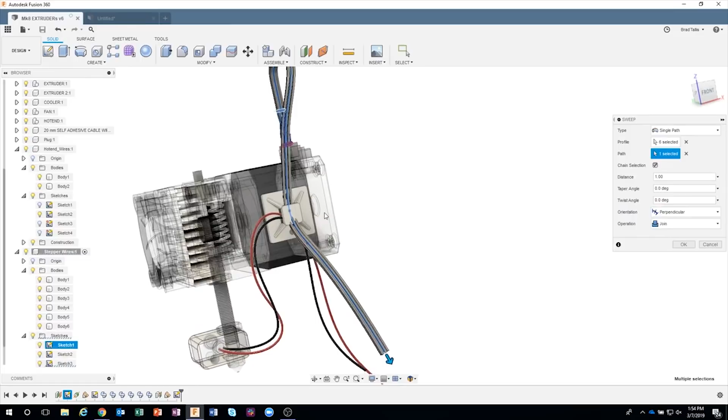What's the profile? I'm actually going to grab all of these shapes here. And again, because this was drawn on a plane and I made sure that this was vertical, all of these are lined up. They're basically tangent with each other. So what's my path? This is my path. And it's going to take the ends of these wires basically and sweep them along that path. Now I can visually see I need to change some stuff here, and that's what's so cool about this. So in this example, it's kind of curving out from this clip.

So I'll say okay. It'll go ahead and accept that sweep for me. Now, this is pretty complicated. There's a lot of curves, a lot of edges going on here, so you can see that it's actually going to take some time to calculate. And again, another tip is I personally recommend getting your spline shapes set pretty close to where you want it to be before you do the actual sweep, especially when you start twisting your sweep, etc.

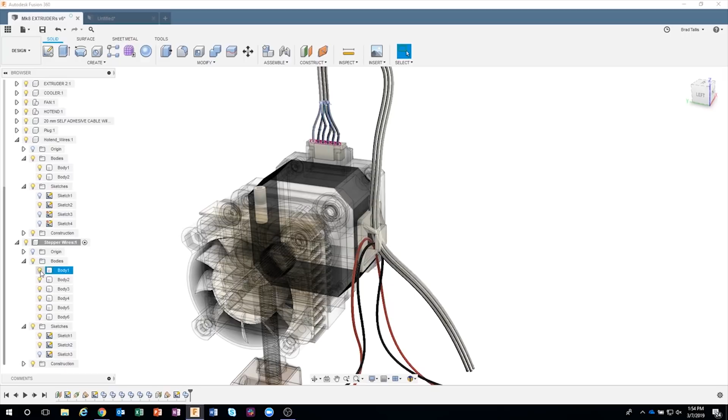So we want to get it as close as we can. So I'm going to come in here and let's turn off those bodies. So I'm just going to turn off the body there and let's turn on our sketch. And maybe we pull this point down a little bit. So I'm just going to move, again, looking straight on. I'm just going to pull that point down, and you can see how it kind of smooths out that transition there. And maybe I pull it in to the left a little bit.

So, okay, it's thinking as it's doing that, because it's actually updating the sweep in the background. So again, this is why I recommend making sure everything is correct before you make some changes like that. So I'm going to go ahead and say okay. And you can see it's actually updating the sweep, even though we can't see the bodies, but I'll go ahead and turn those bodies back on. And we just moved this point down and to the left a little bit, and that should help smooth out the transition. Okay.

So I just glanced at the chat window really quick. Somebody said, why would you route your cables through the cable clip? I totally agree. I was just trying to find something that I could route through. Obviously, you would clip to them. What I was wanting to show here is how you can very precisely guide your wires through holes or through openings and stuff like that. So again, this is not as realistic as it should be, but I didn't have a wire clip. So great observation. So thank you.

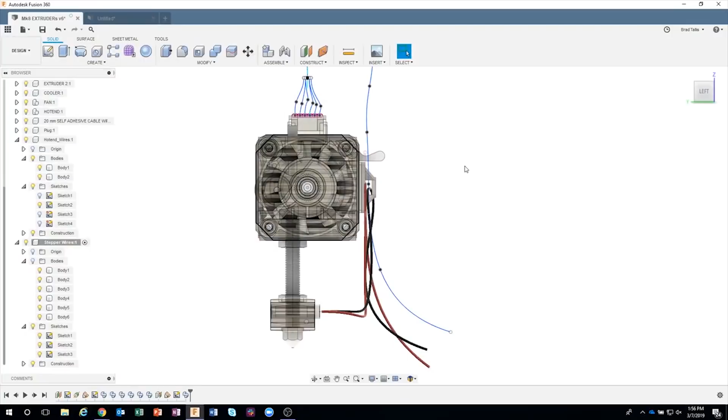Okay, let me turn my bodies back on, and we can see, sure enough, I fixed that. Okay, so this looks pretty good. I'm going to go ahead and twist these now. So let's go ahead and re-edit my sweep. And I think it's doing an autosave. I want to do my twist angle. Now 360 degrees is just one twist. I'm going to go more than that. So I'm just going to say 1,000 degrees. So that's multiple twists there.

So now again, it's going to take some time to do this. So bear with it as it thinks. So again, do this only when necessary. And I'm trying to do this for a realistic looking render. I want to show these wires are twisted together. So that's why I'm using the twist. If you're just trying to show routing channels, hey, the wire's going to go over here, you would just basically, I need to type in an extra 0 here, you would just kind of show the route of where that wire is going to go. So good observation there.

Okay, so now let me switch back. There we go. It's thinking really hard as it twists these cables around. So I'm going to break out of it because I don't want to waste you guys' time because we are almost at the top of the hour, but it will eventually twist all of those wires.